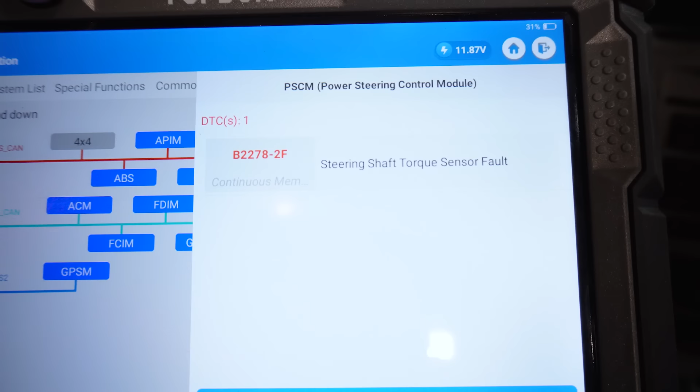Now, for once, there's really not going to be a lot of diagnosis with this, honestly. And chances are, if you're in this video watching it anyway, you're here for replacement. So there is a TSB tied directly to this thing. It's got a TSB number 14-0016.

Step 1 of the service procedure, does the trouble code B2278 pop up? The answer here is yes. So if yes, proceed to step 2 and replace the torque sensor. There's the part number there, a CL8Z3F818-A, and our labor time on here should take about 1.6 hours.

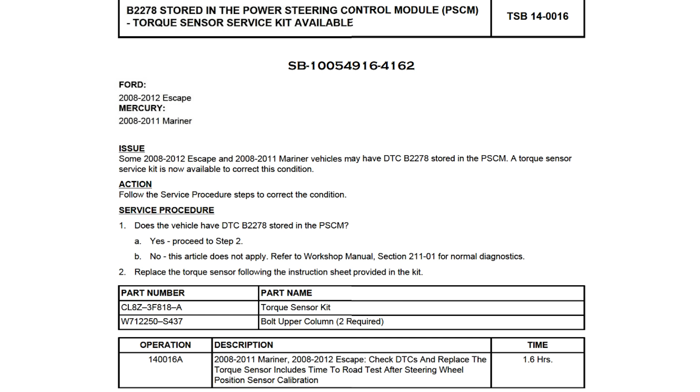Now, I do want to caution you guys on something. If you're looking to be doing this job yourself, you can very easily wreck the torque sensor on installation if you're not careful, okay? It's critical how this sensor is installed. You'll see there's a little, well, let's unwrap it here. There's a little pin in here, and just like on a timing chain tensioner, when you pull the pin, there's really no going back. This pin is intended to keep the inner and outer pieces together.

If you pull this pin out and it's not properly aligned, and you apply power to the power steering module, it can take this steering wheel and rip it all the way to one of the locks, left or right. That power steering module has a ton of torque. If your hands are accidentally near that steering wheel and get caught and that happens, somebody could get hurt.

So we're going to take a lot of precautions making sure that the sensor's installed right, because best case scenario, if you do it wrong, you wreck the sensor. Worst case, somebody gets hurt. So we're going to show you guys the steps to replace this and be confident in that replacement.

Now, like I said, we're not going to really be doing any testing. If we look at a wiring diagram just really quick today, you'll see the power steering control module is listed as an assembly here. And that's the way it used to get serviced when you had trouble with the electronic power steering. This entire assembly only shows power, ground, and network communication going to it. It's not showing the individual sensor inputs to test or replace.

So from the factory, this thing wasn't intended to be serviced. They had issues with it. They've made it serviceable. I wish they would do it on the F-150s as well, but hey, maybe we'll get there someday. All right, now, what do we have to do?

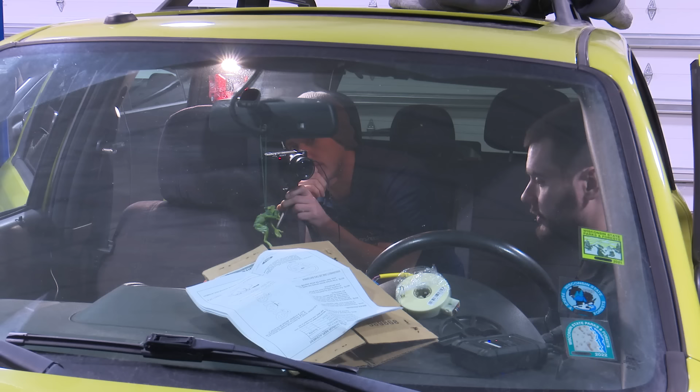First things first, because we have to pull the entire column assembly out, we've removed the driver's seat for ease of filming. 2 guys, 1 Ford Escape. There's not a lot of room in here to get good shots for you guys to be able to follow along with us. Now, if you're doing this at home, you don't have to remove the driver's seat. You can get this entire job done with the driver's seat in place, but we've pulled that out to get it out of the way.

Now we need to disconnect the battery. You don't want to be pulling this column assembly, which includes the airbag, off with the battery powered up. So key out of the ignition. I'll get the battery disconnected and we'll get right after it.

Now you want to make sure that when you do disconnect the battery that you isolate those cables away from the battery itself to make sure they don't flop back onto the battery, energize, and engage that power steering control motor, that assembly under here, when you're not ready, okay? We want to make sure that when we decide to apply power to this system, everything is perfect.

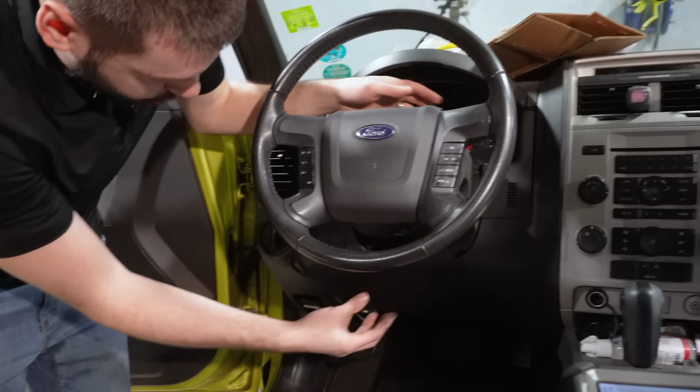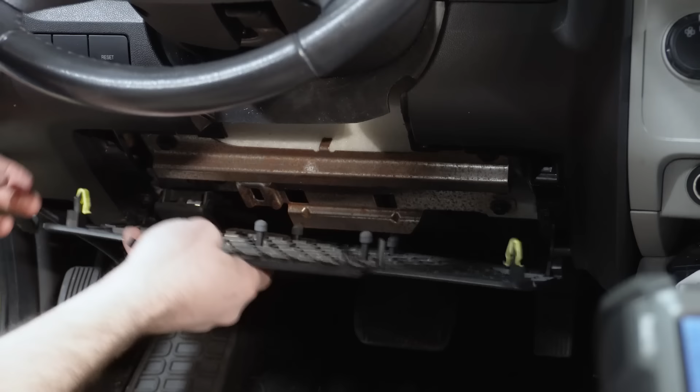All right, first step, we're going to get this shroud off around the steering wheel. Actually, we'll get this knee bolster off first. This is just plastic clips up near the top here. And then towards the bottom, there's 2 little hinged pieces here. So that comes off. Looks like we got 4 10mm bolts holding this metal knee bolster on.

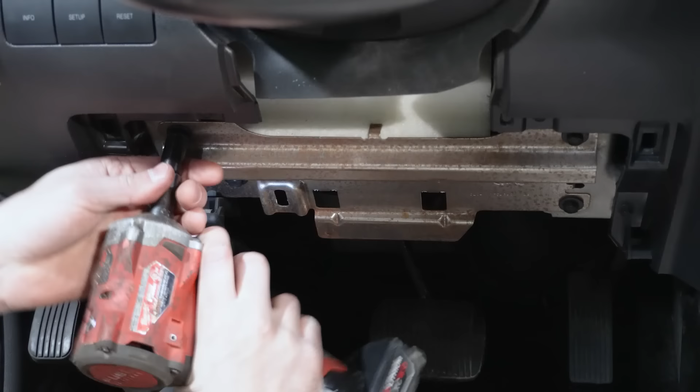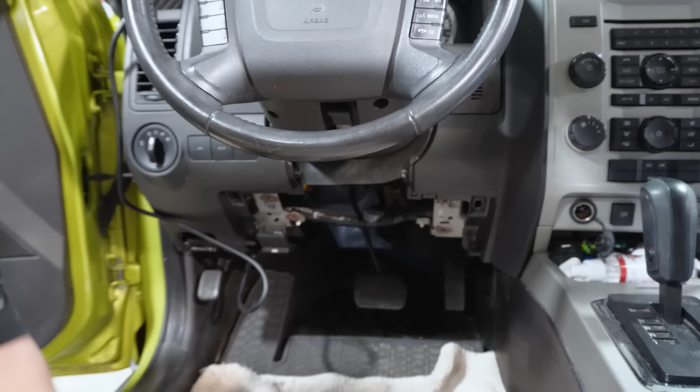Nice little piece of custom-made foam right there. And if we can get a shot in here, you'll see this is our power steering motor assembly. Let me grab you guys a flashlight. So right here is our power steering motor assembly. Our sensor, this yellow wire right here, is actually the connector for our sensor.

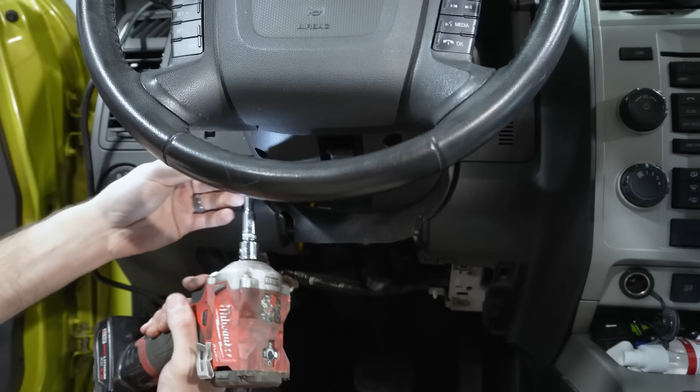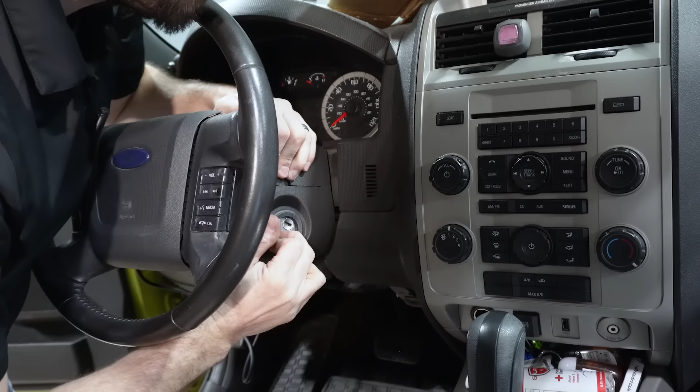So here's what we're getting to, which we'll pull all this apart. So what do we got here? Looks like 5.5. Yep, 5.5 millimeter on the steering shroud screws or bolts. And then there's just some clips that kind of hold this shroud assembly together. And of course, the right side doesn't want to release. There's 1 and 2. All right, we'll set those to the side.

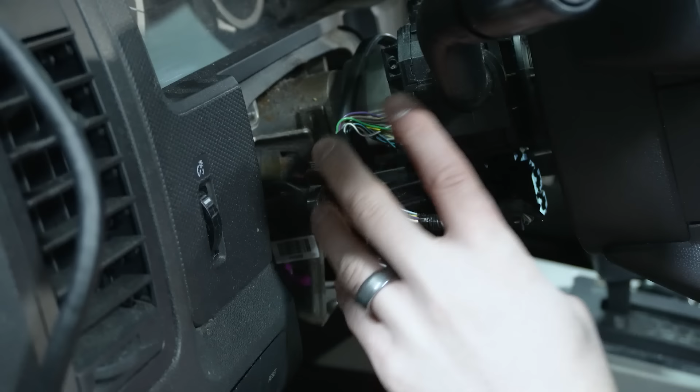And now we have to come over here and start to disconnect the electrical connectors off of the steering column. So all of these connectors, ignition switch, airbag, clock spring, all of that, will leave the harness in the vehicle and we'll remove the entire column with the wiring all removed. Now if everything goes right here, we should be able to get this done and not have to pull this airbag off, because you know, it's so much fun taking the horn pad off of these. If you watch the other video and watch me struggle a little bit on it, it was a ton of fun.

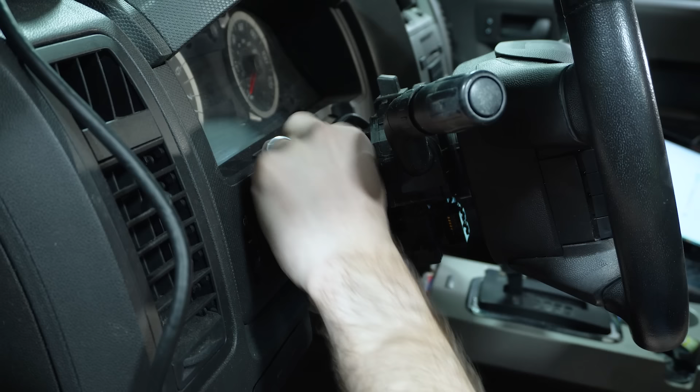A tool like this really helps for getting these pins out. There we go. And what do we got? We got one more here. There we go. So our harness, we'll just kind of route it down underneath the dash here, keep it out of our way so we're not messing with it. And now our steering column is electronically all disconnected.

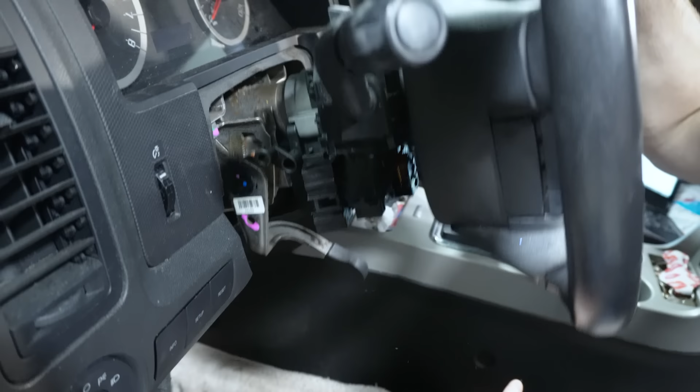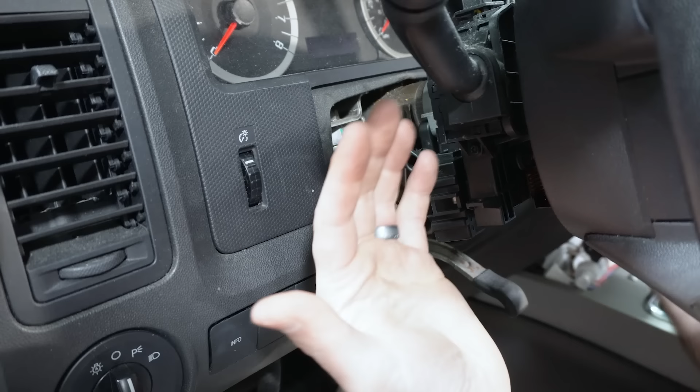Now we got two big bolts here that are Torx. We'll see what size that is here in a second. What we're gonna do, we're gonna remove these two bolts. That will loosen this steering column assembly, and that'll cause this entire thing to be able to drop down. So we do have to support it while we're unbolting it. I'm gonna lock the column in right now.

Okay, so we got a T47 Torx. Maybe. Maybe not. Maybe it's a T45, my bad. I thought T47 sounded kind of strange. Let's try that again. So we got a T45 Torx. Remove one.

And again, use one hand to support the wheel at this point, because you'll see here, everything's loose now. And we should be able to just pull this off. Now you want to be careful. I forgot to do one step here. Actually, we'll back up here a second, and I want to thread one of these guys back in quick to hold this in place, because I want to make sure we don't wreck our clock spring on here. All right, we'll let that hang there.

So the issue is when we pull this column off, if you were to turn the steering wheel separate of the column assembly, you could wreck the clock spring. Now there's bungee cords you could use, really anything that's gonna isolate or connect the steering wheel to the column. Now a little motion back and forth like this, not the end of the world. What we're trying to do is keep it from going a full revolution.

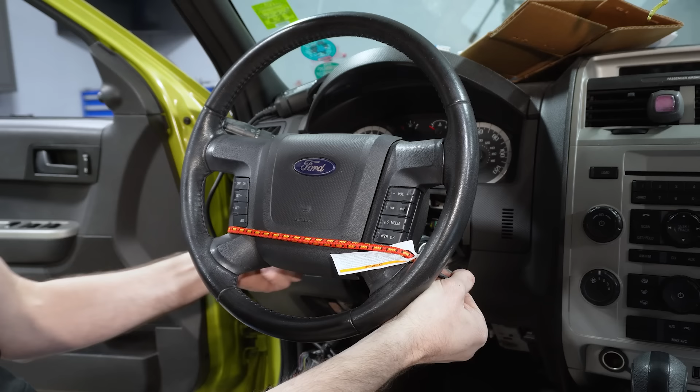So I'm gonna bungee cord around the backside. I'm just gonna come through the front of the wheel like this, trying not to push on the steering wheel control buttons, and hopefully not hit myself in the face with this bungee cord either. It's a little short. Where can I go? Sorry, putting my head in the camera. We don't want to put a lot of pressure on these buttons. I don't want to wreck them.

Okay, so now our wheel can still turn a little bit, but it's not going to turn all the way around. Get our scan tool out of the way. Now, back to the task at hand. Pulling this bolt back out, again, supporting the wheel.

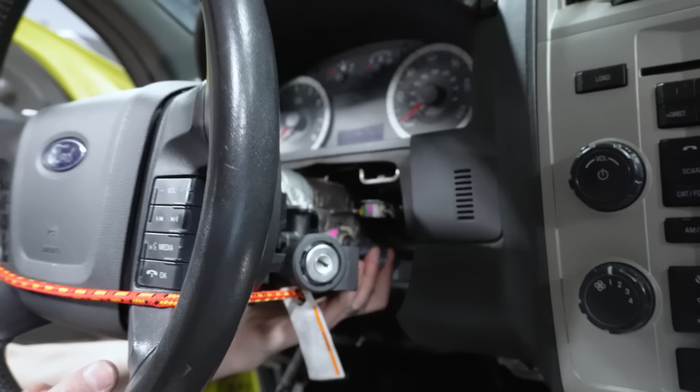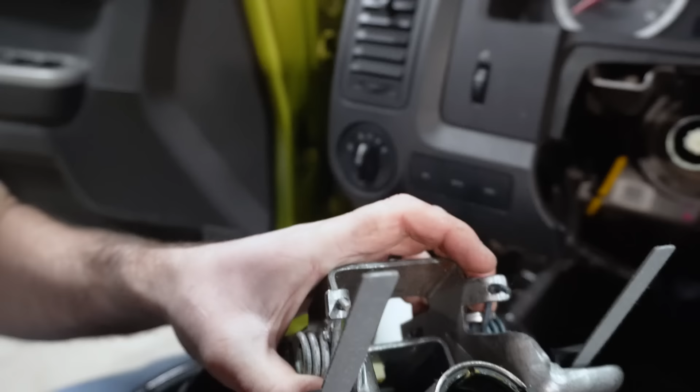And with a nice gentle tug, we'll pull this thing right off of the steering shaft assembly. Like so. Now, you don't have to be too careful with this, making sure it's aligned perfectly, because one of the teeth here, or one of the splines, is larger than the others, making sure it can really only go back on in one place. So you don't have to worry too much about that.

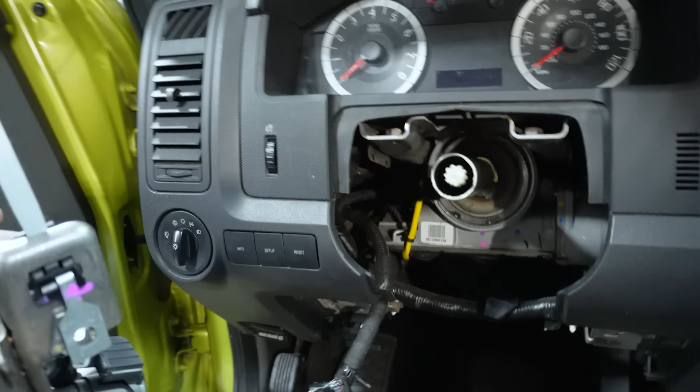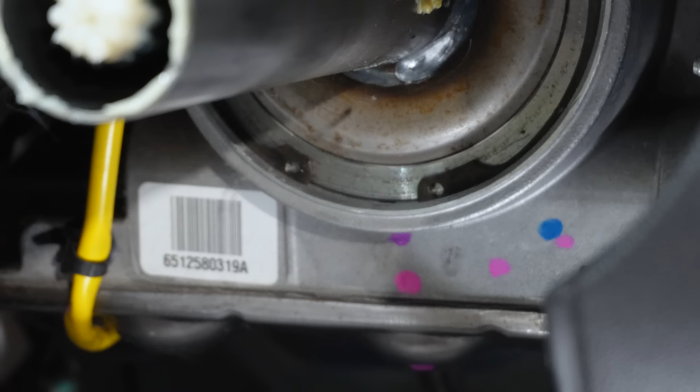We'll set this aside. Remember, this does have an airbag in it. So just keep that in mind wherever you're setting that. That does have an airbag inside. Now, we've got our shaft here that's held on by a snap ring there. So snap ring pliers to remove that. I think this is going to be too small.

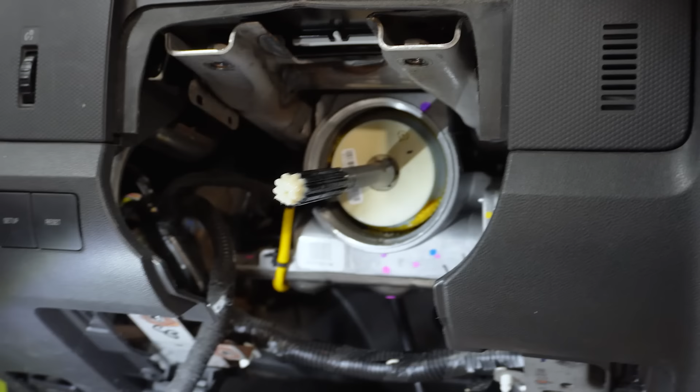So we'll get in here with a snap ring pliers, we'll pinch it together, hopefully not send it flying. Woo! That's a big snap ring. All right, put that out of the way. Now this guy should basically fall right off. Set that up there. And there is our sensor that we're going after.

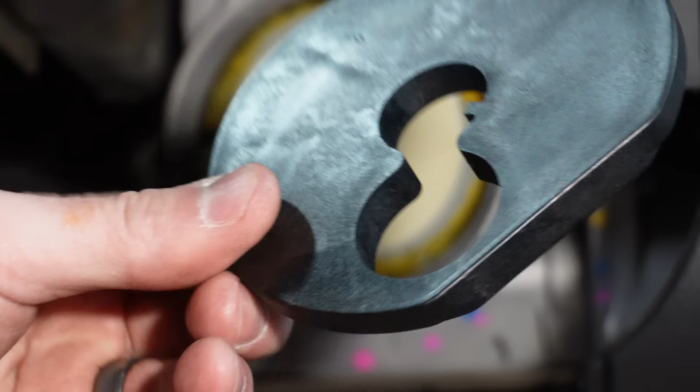Okay, so don't go undoing this sensor yet. We don't want to be popping this sensor out until we have this steering shaft perfectly lined up. That's what this black plastic piece is that comes with the new sensor. This is the alignment tool, and we want to make sure that our steering gear itself is aligned properly. So pop out this little gasket right here that's around the wiring of the sensor. Don't forget to put this back in.

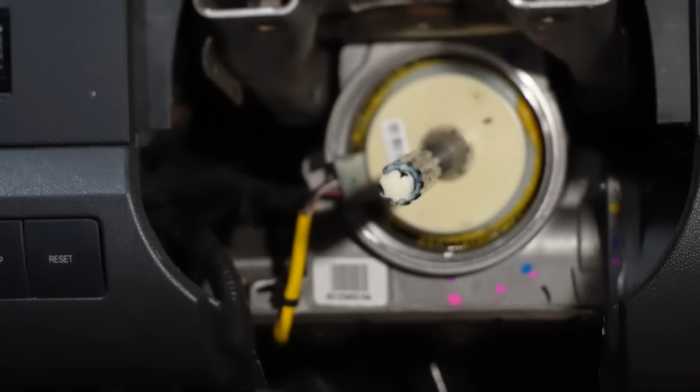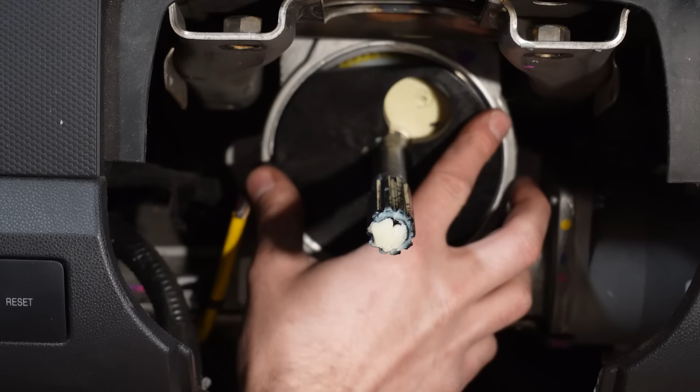And then we'll install this tool, and this flat should fit in the flat of the assembly. It should slide right down over the shaft, and it's not. Even though our steering wheel was perfectly straight and level when we removed everything, that's not the case right now. It's not lined up perfectly. So what we want to do now, and that's why I have the front of the vehicle up in the air right now, is I want to bump the tires to get this thing to line up perfectly.

When we get this tool lined up, we should end up seeing a small hole right in this little window right here. There should be a hole, and that hole right there is where this pin is installed into on the brand new sensor. So let me kick the tires a little bit and get this thing lined up.

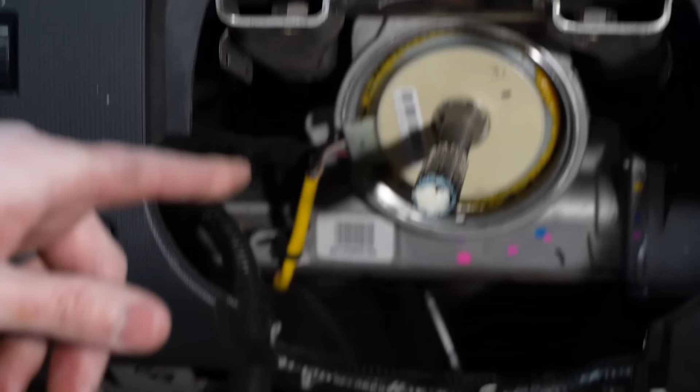So I'm just going to take the tire and move it very, very slowly, small, tiny amounts. This is where it helps to have somebody in the car watching. Pass again, a little bit more. Like a real small. There you go, perfect. Okay, so all I did was tap the tire and I was able to get that thing lined up. And now, if everything is right, we should be able to put this alignment tool on.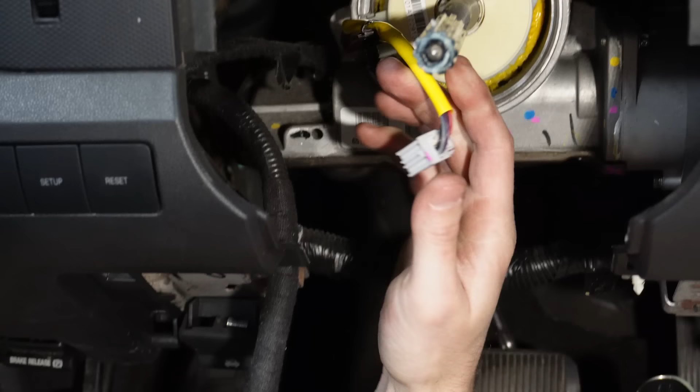We should be able to very carefully take a pick kind of behind the sensor, just start working it outwards.

Feel kind of bad. I haven't referenced the instruction sheet yet at all.

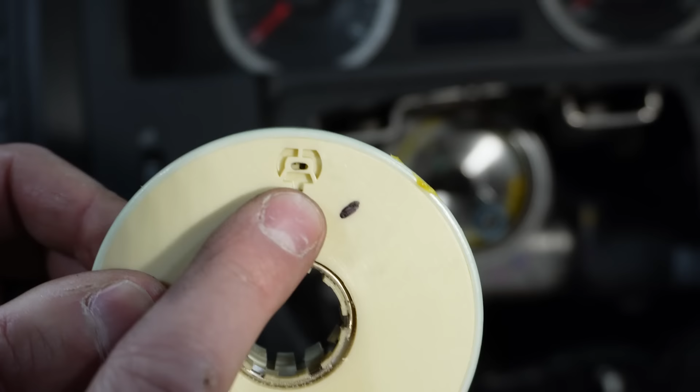Grab another pick. Two picks are probably better than one for this. We're going to try to wiggle it out. There it goes. All right. So there's our old sensor. I don't know if it's easier to see now maybe, but you can see that little hole right in the window there. That's what we're shooting for with the new one.

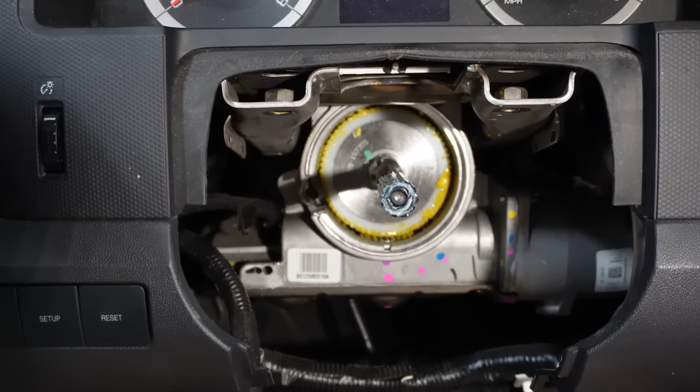Nothing really to worry about cleaning up inside of here. The grease looks really good. So time to pop the new one in.

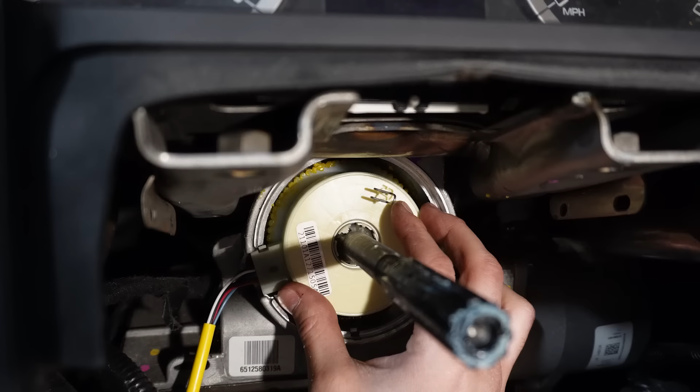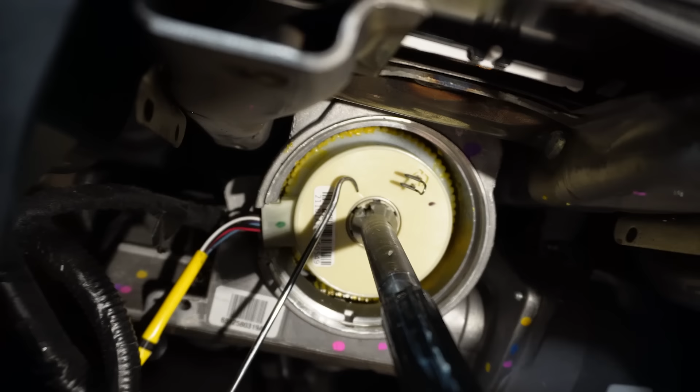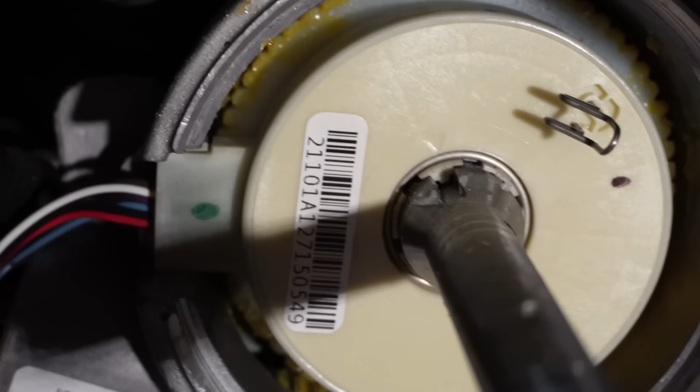Should sit nice and tight against there. It'll actually kind of stop itself. One thing I haven't mentioned yet is there's a little, see a little arrow right here? That's just supposed to line up with the slot in the shaft, this little arrow. Not exactly the most intricate of designs, but arrow, shaft. Let me see if I can zoom in on that one. Right there. Arrow and shaft should line up.

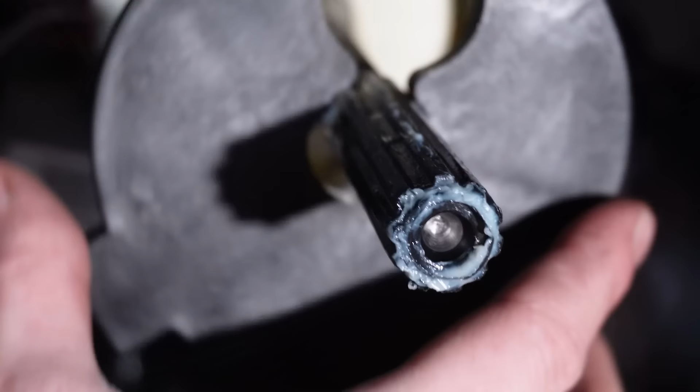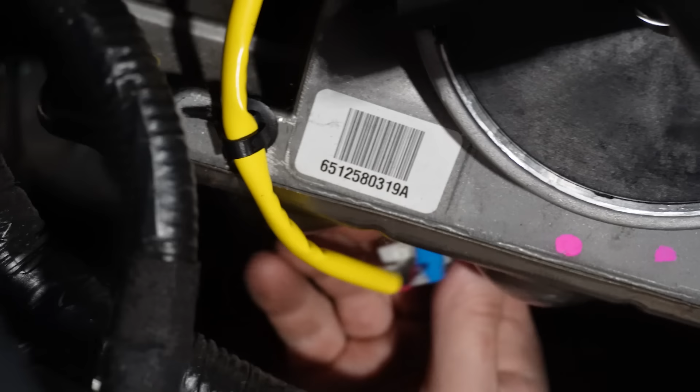Our pin is still inside. Oh, I accidentally almost just pulled it out. We'll leave that pin inside of there until we're set on this thing's position. All right, let's see if our tool fits back over. Tool still fits. That's good. Get our connector back in place, our harness routed back to where it needs to be. Don't forget the blue locking tab on there, lock that down. Now our tool, we know the sensor's in all the way because our tool is once again flush on the face here. So that's good.

Everything looks good there. Now, because I don't want to second guess myself, time to whip out the instruction manual from Ford quick and just make sure that we're not missing anything here prior to pulling that pin. Because once you pull the pin, Mr. Steering Sensor is no longer your friend, just like a timing chain tensioner. So it says to install the alignment tool, make sure that's good, press down on the tool to seat the sensor. So I guess they want you to actually use the tool to seat the sensor on there. I don't know, I think my fingers kind of worked okay for that.

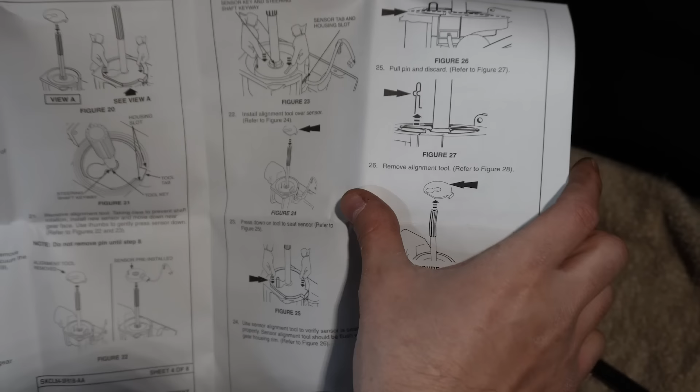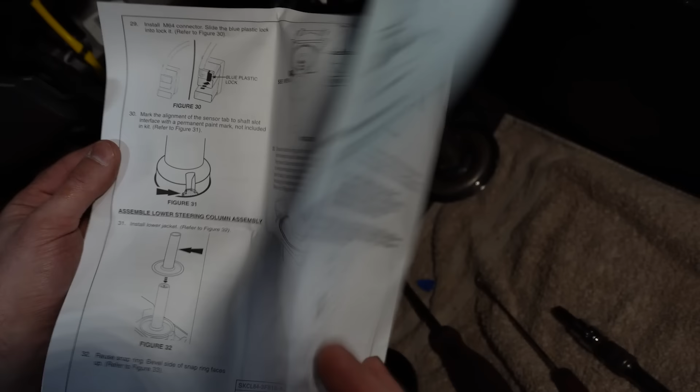Pull the pin and discard, remove the alignment tool, install the clip, install the sensor, and reinstall everything. So nothing too special there. You know, we went through the alignment procedure prior to removing the old sensor, so we should be good here. Pull our pin. And you can see the little circle hole there, just to the left side of the window.

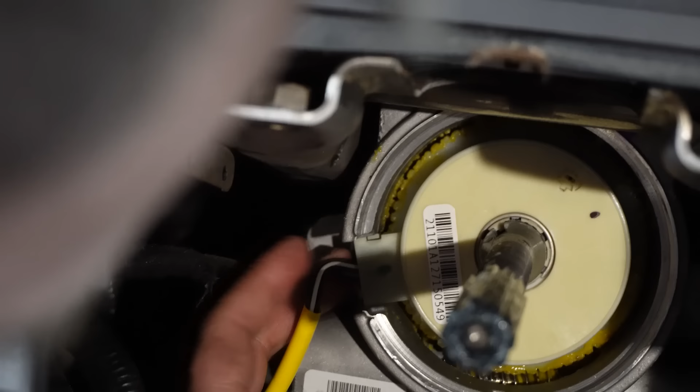Let's go ahead and get our steering. Before we do that, we gotta get the grommet back on, right? Almost forgot it. That's never happened before, right? Oh, we gotta make sure we get it the right direction. Making myself look like a fool because I don't remember how it went on. Like so. So the cut piece here goes to the top, fits into there, and really it's just to keep any dust and debris out of there.

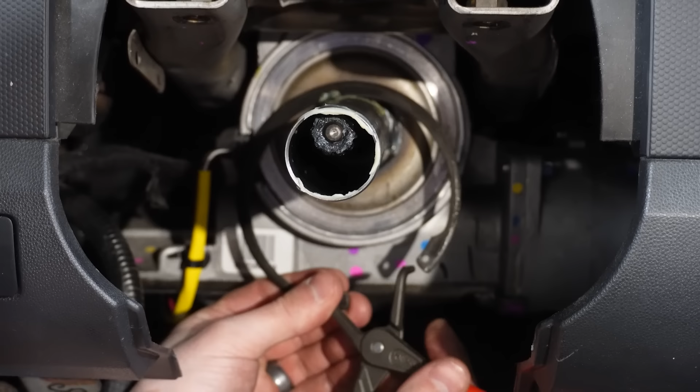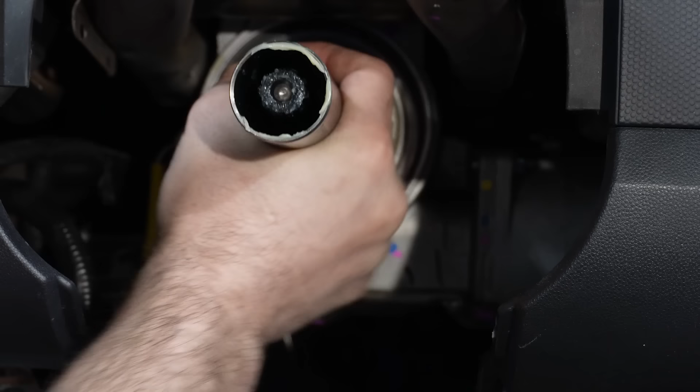Now we can put this guy back on, make sure it's sitting flush, and hopefully we won't send our snap ring flying. A bigger snap ring pliers would definitely be handy for this job, if you have one. Just like so. Now that gets that set back in there. Now we can reinstall the column.

Now, according to the instructions on here, when we're installing this, the steering wheel should be at the 11 o'clock position, and this is normal for this installation. So I'm going to actually pull my bungee cord off here, make it a little bit easier. We'll have the column assembly where it needs to be, and we'll move the steering wheel to roughly the 11 o'clock position, and it should slide right in. If you have to force it, something is wrong, okay? It should slip in there nicely. Again, it should only go on in one spot. Now we'll get our bolts started.

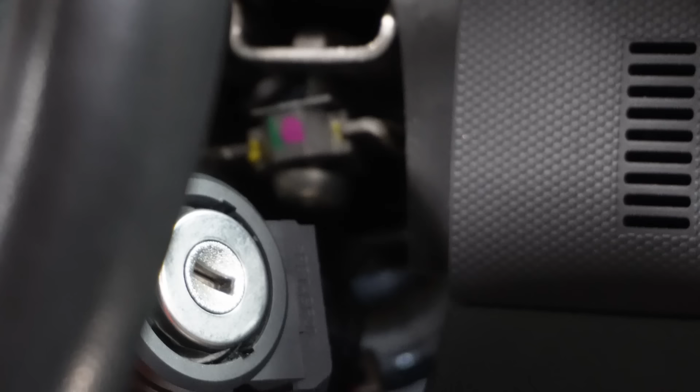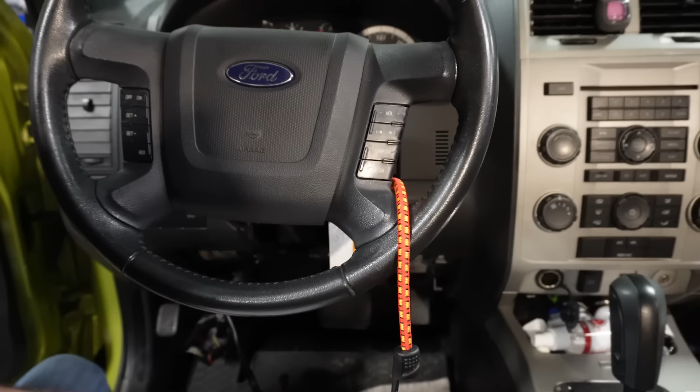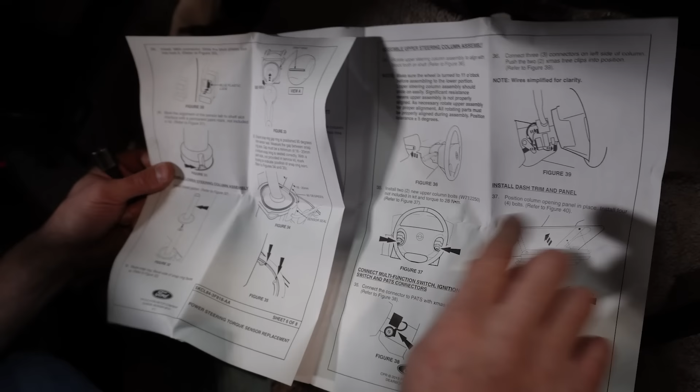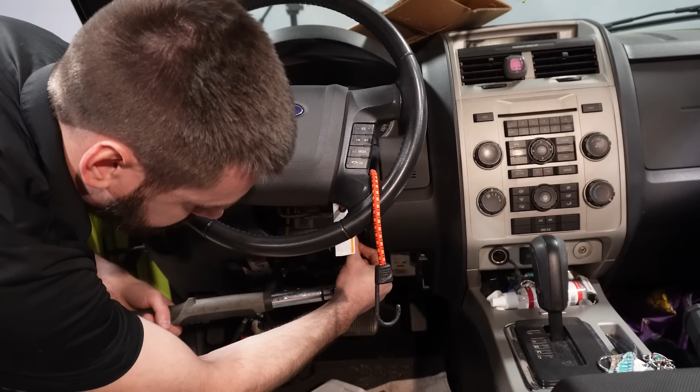Let's see if they give us a torque value in the instructions here. 28 Newton meters. All right, get this guy out of the way.

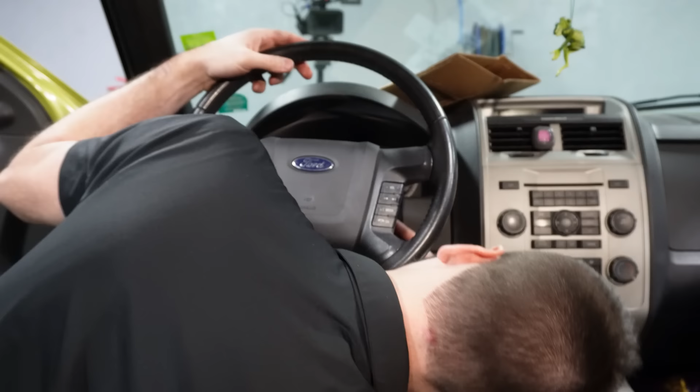And now I'm just going to go ahead and plug all the electrical connectors back into the column. Nothing too crazy here. Just make sure you route them in the exact location they were before. And make sure the Christmas tree pins are all in their proper spots. Make sure the wiring doesn't get pinched when we put the shroud back on later. So now that's all plugged back in. We should be ready to flip our key on here and test this thing out. Before we bother putting the rest of the shrouds on, I always like to make sure that we're good to go. So I'm going to go ahead and hook the battery back up.

Okay, moment of truth time. Now, if we did everything right, we should put the key in here and the wheel shouldn't do anything wild. Now, if I did something wrong, you should stop watching the video now. Just kidding. Let's see what happens. Do not do one of these and install the key, okay? This motor's got a ton of torque. I don't want anybody breaking a wrist or anything like that. So here we go.

You know, why is the default volume blowing your eardrums out? I don't get it. Ford likes to party. Thanks for the commentary from the back.

Ford likes to party. All right, let's fire this thing up and see if we've got power steering. Whoa, that's nice. So it turns. Again, I'm not looping any fingers through this wheel because I don't trust it at this point. So we'll shut that off. Airbag light is on. Everybody's plugged in. Hopefully something's not broken.

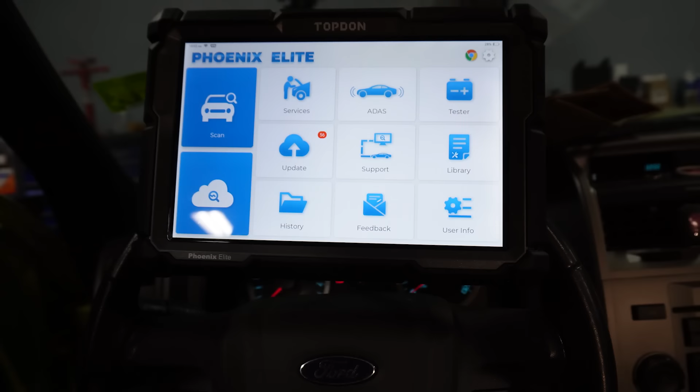Well, that's fun. Let's figure out what we got in there for codes. It's fully seated. Everybody's plugged back in where they belong. Let's see what we've... Oh. All right, you know, I'm curious about that airbag. Let's start there. So we'll get into the RCM, restraint control module. Oh, horn works. Clock spring's working, at least for the horn switch.

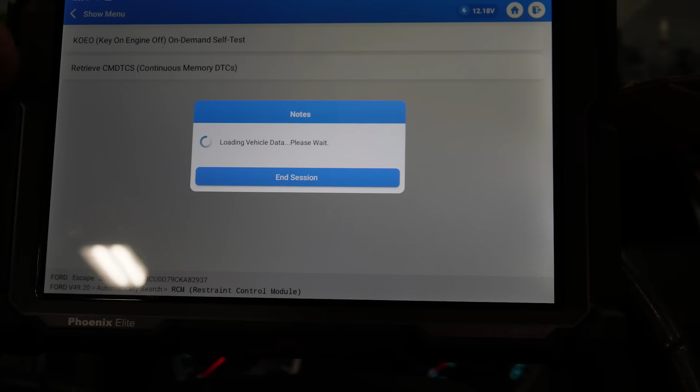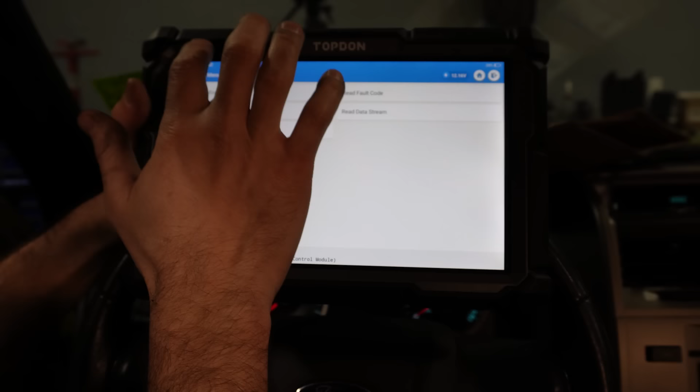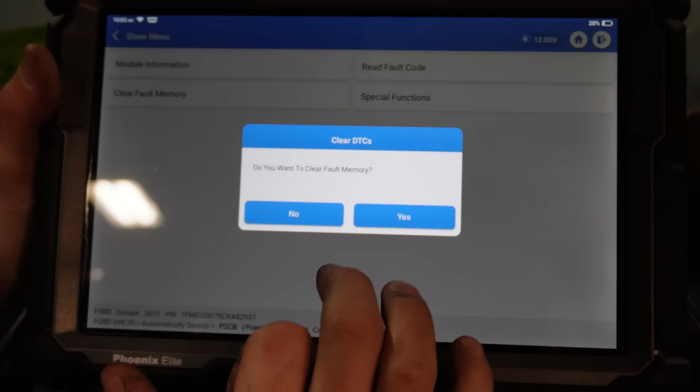The driver's seat's out of the car. Whoops. Yeah, that'll do it. Again, we pull the driver's seat out because there's not a lot of room in here. Okay, let's do a relearn quick since we got the scan tool hooked up. Let's go back into our power steering control module and learn the 0 position of this sensor. We'll clear the codes first. Actually, let's make sure there's no other codes in there first.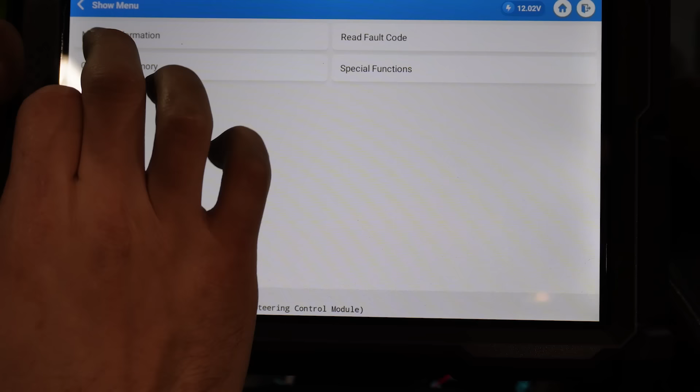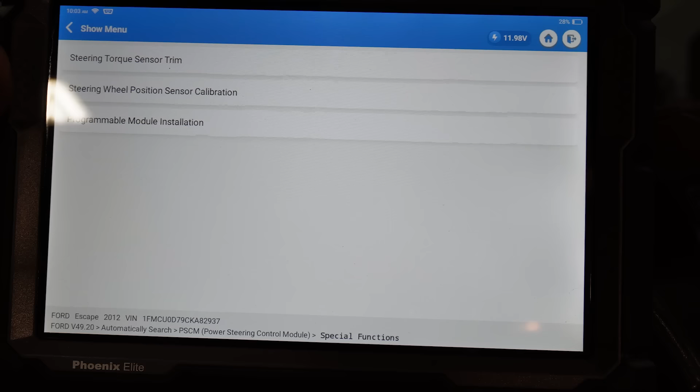All right, still just our 2278. That's pretty much a history code at this point. We'll clear that out. Good to go. We'll verify that it's actually out. Beautiful. And we'll go into our special functions, and we are going to go into steering wheel position sensor calibration.

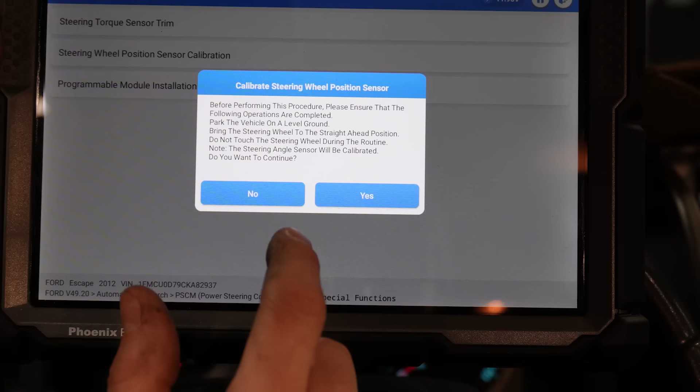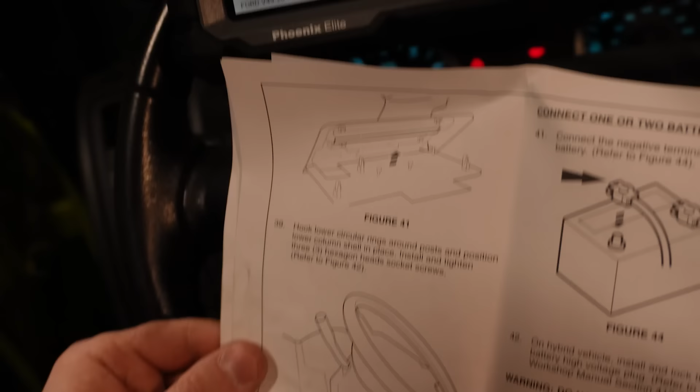Before performing this procedure, blah, blah, blah. Actually, no, let's go to trim once and see what that does. Is used to set the torque and position for the steering sensor after replacing the torque sensor. So we're going to go to trim, not sensor calibration. We're going to do the trim. And actually, let's see if it mentions that in here. Connect the terminal, hybrid vehicle, blah, blah, blah. Calibration procedure. See general procedures.

Okay, so they're not telling us in the instructions, but we went to steering torque sensor trim, and that's telling us that we want to do this following replacement. Do you want to continue? Yes. Ensure that the vehicle conditions are met. Stationary, steering wheel straight ahead position. Do not touch the steering wheel during this procedure. Now, I'm going to have to stick my head in here and make sure this looks good. I think that looks like a pretty straight steering wheel. We'll go ahead and push OK.

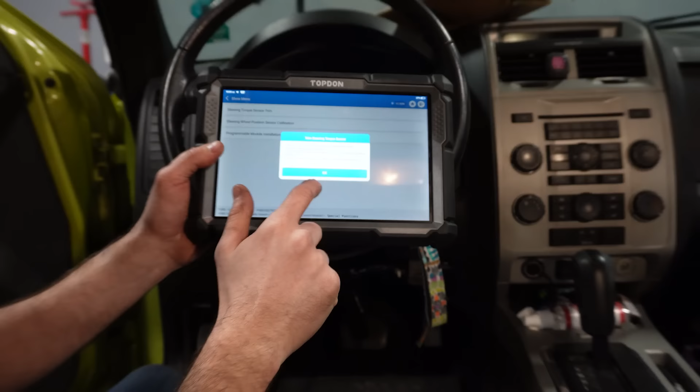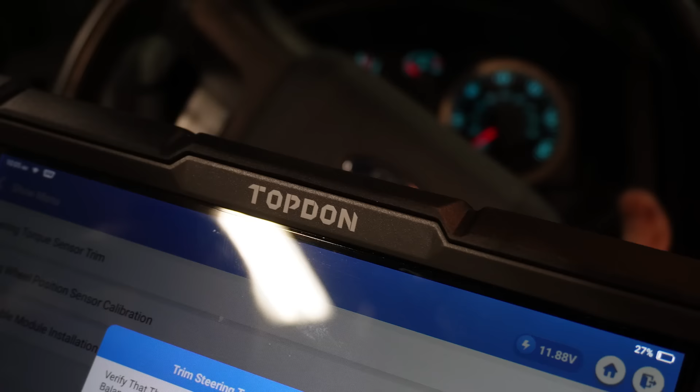Ignition on, yes. It's been success. Turn ignition off, cool. Start the engine. Okay. Verify that the steering resistance is balanced. Rotate clockwise and counterclockwise, and verify that the effort required in each direction is equal. Again, I'm not sticking any fingers in the steering wheel yet. That feels pretty good. But again, front end's in the air on here still. Let me drop the front end down and get this thing actually requiring some torque.

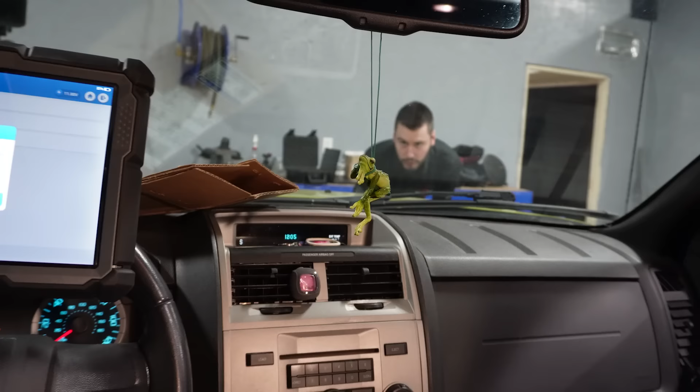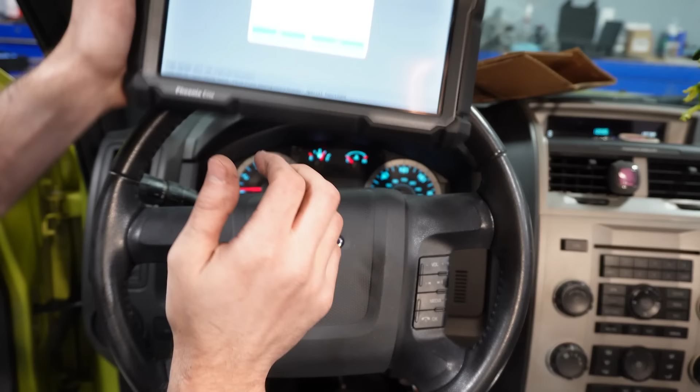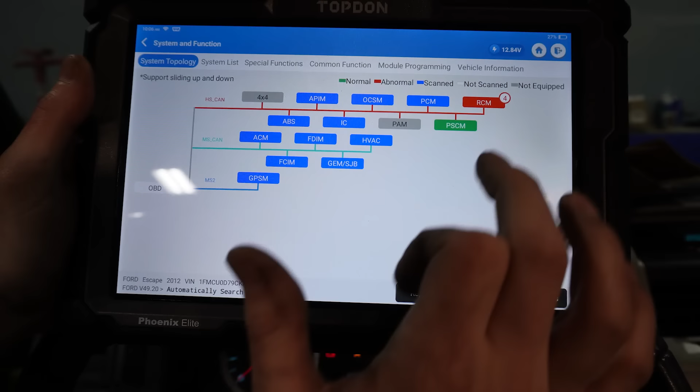Going for a ride. Brrr. Okay, now that we actually have some torque required for this, that's feeling like power steering is doing its job. That's feeling good as well. Back to center. Is steering resistance equal? Yes. Turn off the ignition. Okay. It is now complete. Well, let's go back here. Now, oh, it's green. Green is good.

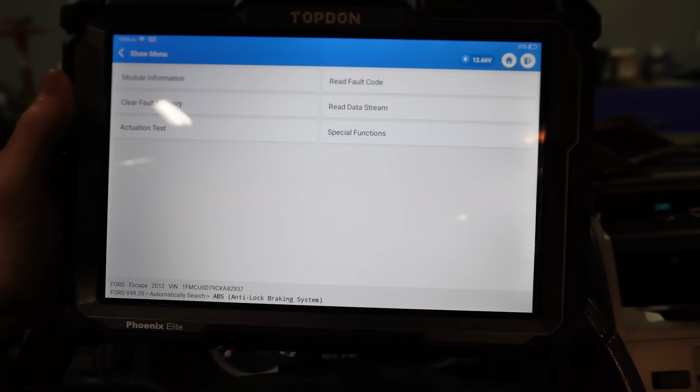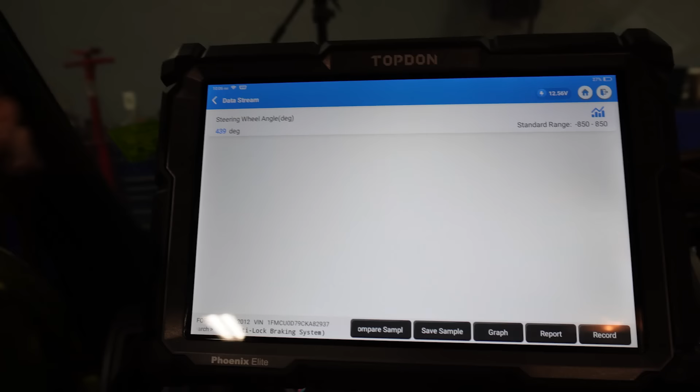Let's go into the ABS module. I want to show you guys just some quick data in here. Now, I know I didn't show this in the beginning of the video, but I want to show it now just because I want you guys to see there is steering angle data within here. And we'll see here. I don't remember off the top of my head what it was in the beginning. Right now we're at 439 degrees. Okay.

Codes, well, besides the fact that the driver's seat is obviously unplugged on here, we'll have to get that put back in. Guys, I'm not going to bother showing you how to put the bottom panel back on. You know, this metal panel, it's 4 10mm bolts. Pop your plastics back together, secure them back down. Really not too concerned about torque specs on those things. Just snug. Don't go hammering them with the impact.

But this thing is fixed up. B2278 TSB for replacement of the steering torque sensor to give us power steering back on this mean green, lime green Escape. I think that's going to do it for today.